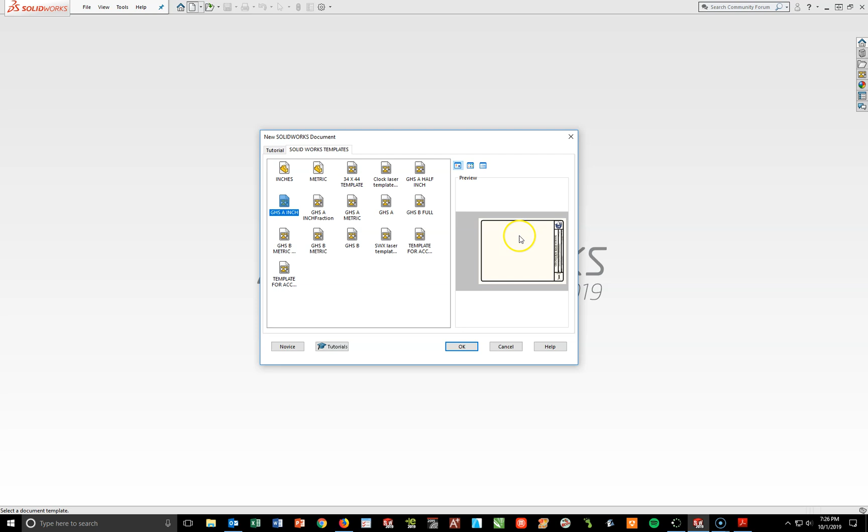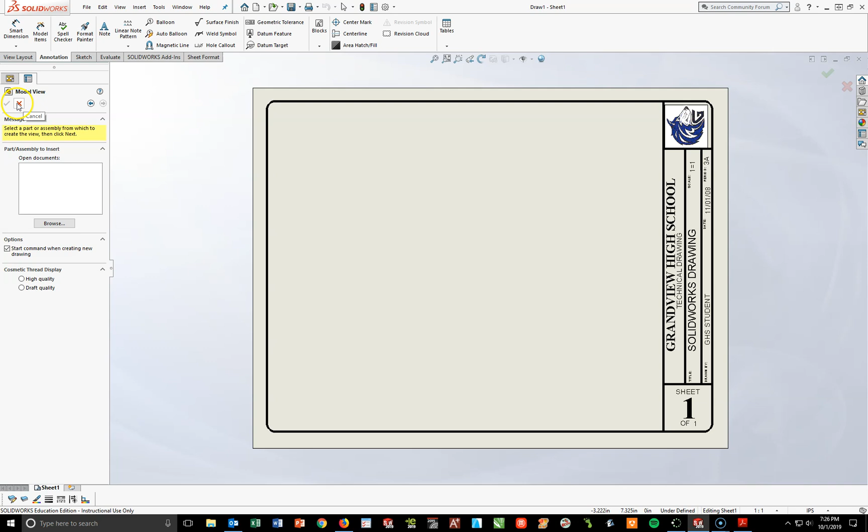Now, as usual, SOLIDWORKS thinks we're going to do a part drawing, but we have not created parts yet. We're just going to use the paper simply as a sketch tool. So I'll go to my left where the red X is under Model View, left click, and then hit my F key to center up the paper.

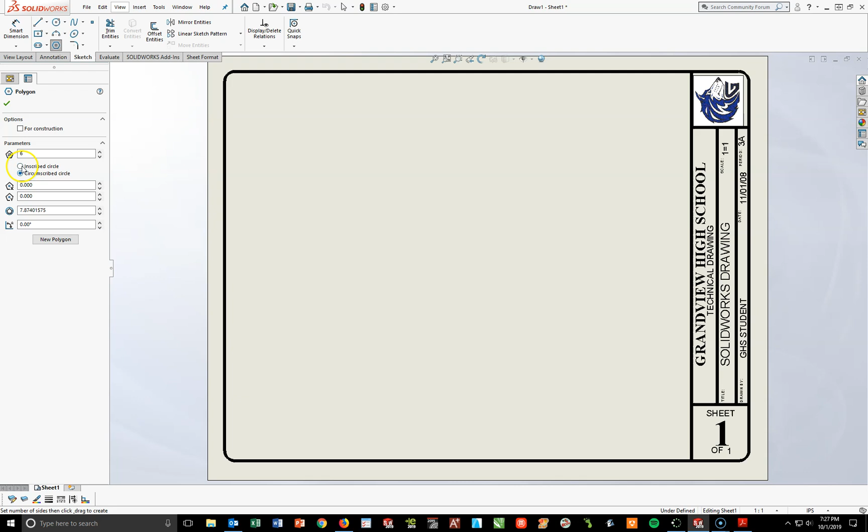Now we're going to start this off with a circumscribed polygon. I'll go under my sketch toolbar and start with a six-sided figure. I'll go up to my polygon tool, use the six-sided option, but I want the circle to be circumscribed, meaning the circle is on the outside edge. So I'll click in the middle of my screen.

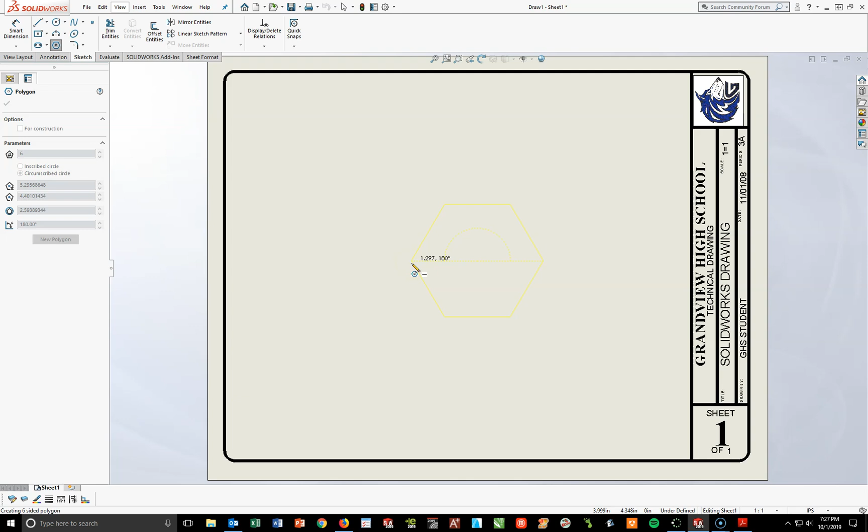I'm going to left click, and I want to make sure the horizontal line is flush at the top. I don't want to pull straight up because otherwise this thing will be twisted. I want to pull directly to my right or left horizontally, pull either way until it looks about the right size, and left click.

Now, at this point, I want to click the box that says For Construction under the Options tab. That automatically changes the lines to dashed lines, which is what we want right now. I'll hit my check mark or escape to exit the tool.

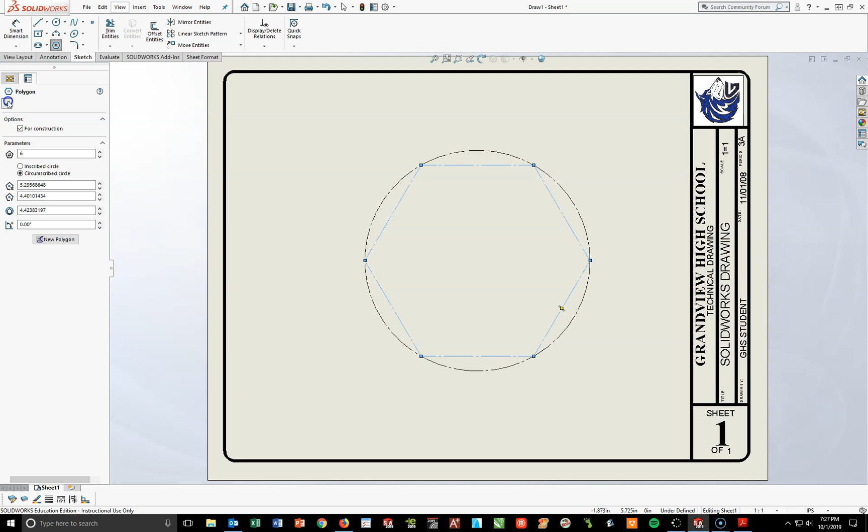I'm going to turn on my smart dimension, hit the outside circle, pull down, and make this a diameter of 4 inches.

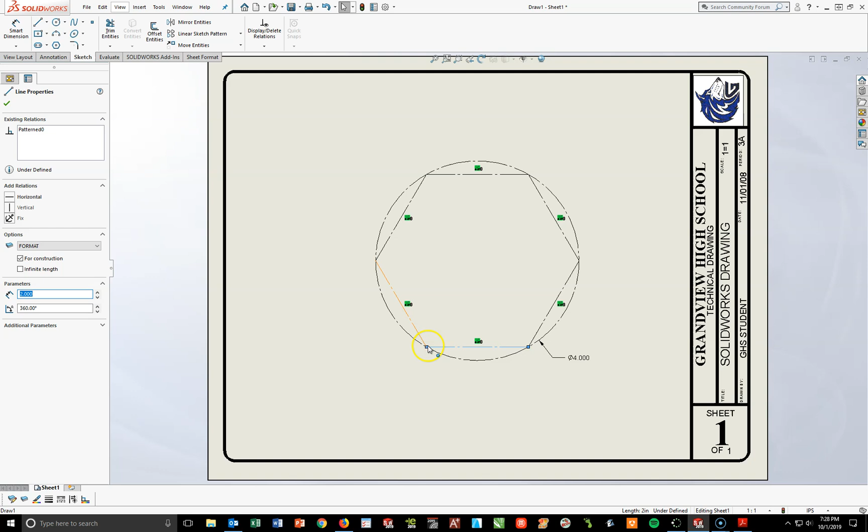Now I'm also going to make sure my lines are horizontal. I'll click on this bottom line and make sure it's perfectly horizontal so this thing is sitting in the right orientation. So I click on the bottom line, look to my left, and click the word horizontal. Hit your check mark, and now you have your part ready to start.

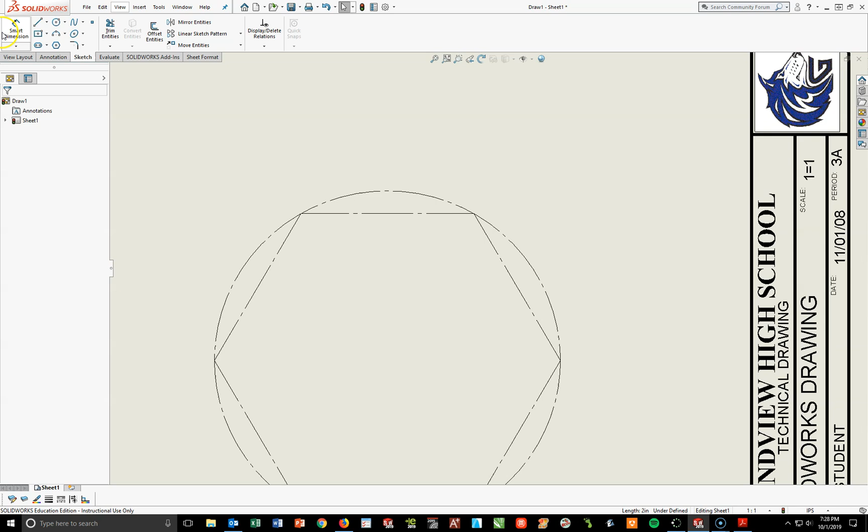The next thing I want to do is add some circles. I'm going to add 2 circles to each vertex of this hexagon. I'll turn on my circle tool, go to each corner, and draw 2 circles.

Now, I could also draw just one of these and pattern it 6 times, since we've been using the circular pattern tool, and that would work also. But in this case, I'm going to get these in here, dimension both circles, and make the circles equal to each other as I work around the part.

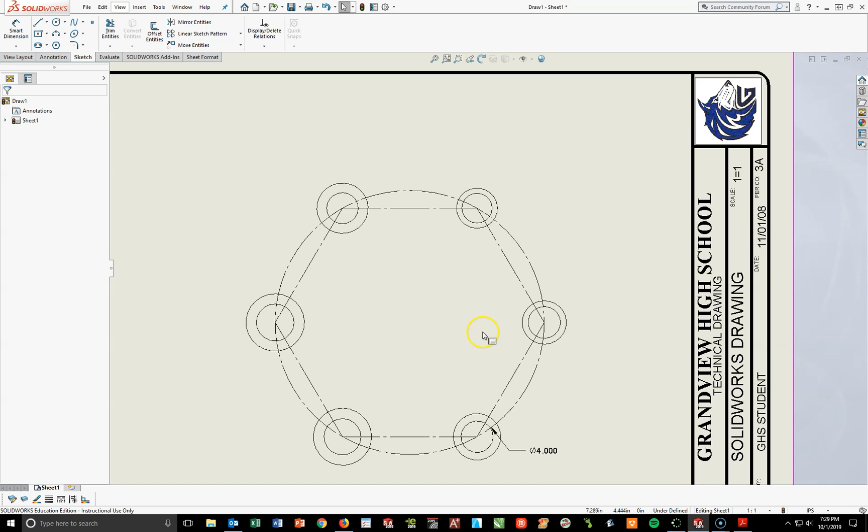So I'll start off by adding a dimension on this outside right-hand circle at 1 inch. Then I'll click the inside circle, pull down, and dimension this to a diameter of 0.5.

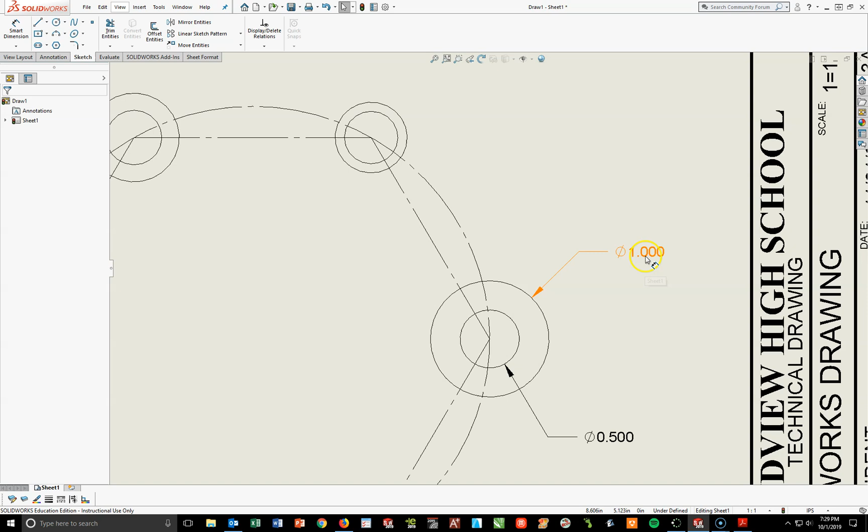Now I'm going to turn my dimensioning tool off, and holding down my control key, I'll click on all of the outside circles first. So holding my control key and continuing with my left mouse button, I hit the outside edge of these outside circles, then come over to the left and make them all equal to each other.

Hit your check mark. Now I'll repeat that pattern by doing the inside circles. I'll hold my control key, click on each of the inside circles, all 6 of them, and again, to my left, make them all equal.

Now I'll add in the notes as I go. This one has a 6 x 1.00. I'll left click on this, and over where it says dimension text, put my cursor in front. I'll type the number 6, turn on caps lock, spacebar, X, space. Actually I'll get rid of that last space. That looks good enough. Hit your check mark.

Now I'm going to do the same thing with this one. This one says 0.5, 6 holes equally spaced. So I'll put my cursor at the end of this mod diam DIM. I'll hit my space key, type 6 holes, hit enter, and then type in equally spaced. Hit your check mark when you are done.

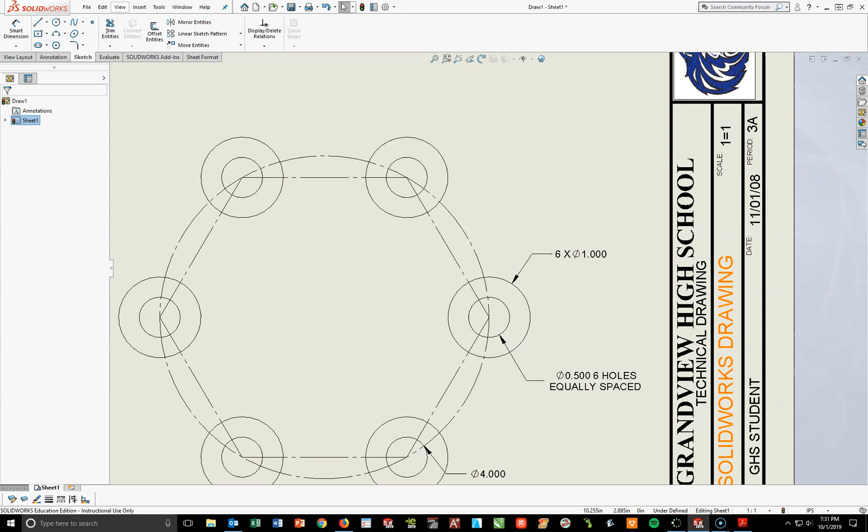Okay, now going on to the next step, I need to actually go back - I forgot one other step. I've got to draw some construction lines across this part. So I'll go back up to center line, hover on this left diamond, pull a little bit out, left click and pull across.

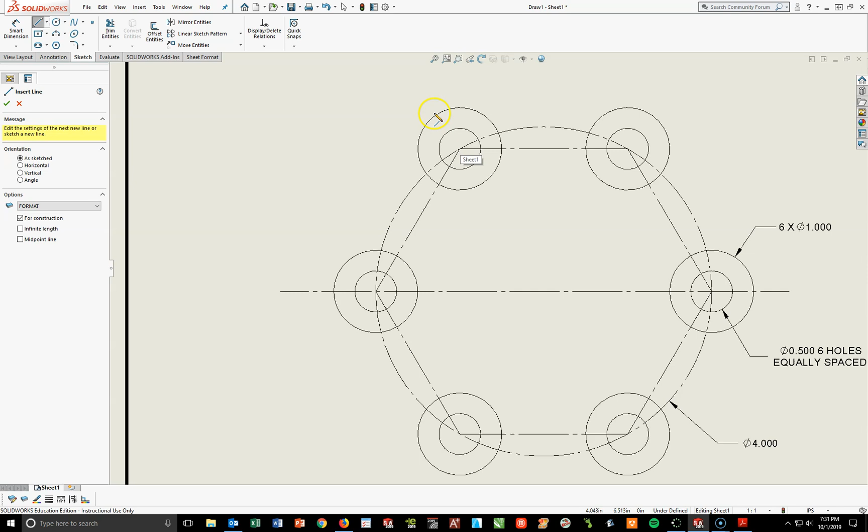I'm going to do the same thing here, pull out this part right here. Honestly, what I'll probably end up doing on this one is just go ahead and draw a couple lines, one this way. Then I'll add a relationship between that line and this corner using my control key, and make them coincident. I'll do that at both sides. So I'll come down here, hit this corner, control key, this line, coincident.

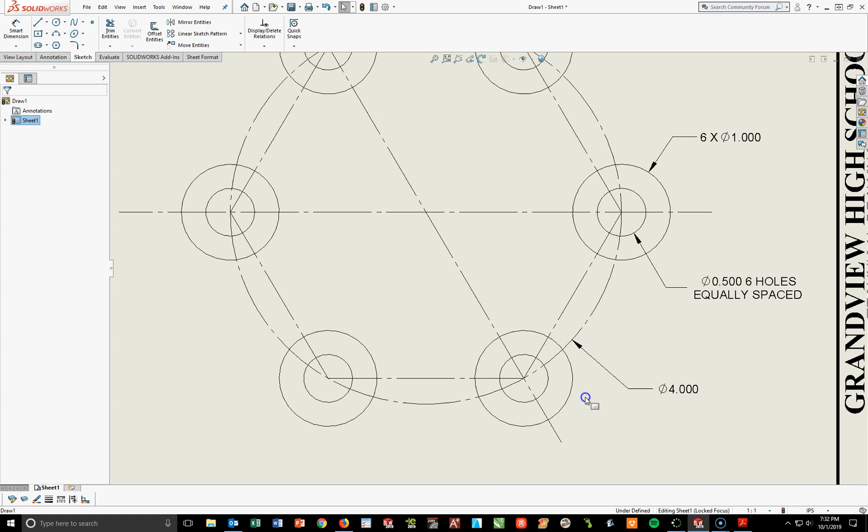I'll repeat that one more time. I'm going to take the next line, draw it across the part, hit escape to turn the tool off, and holding my control key, take that corner and this line and make them coincident. I'll go up top, hit that line and this corner, and make them coincident. Check mark.

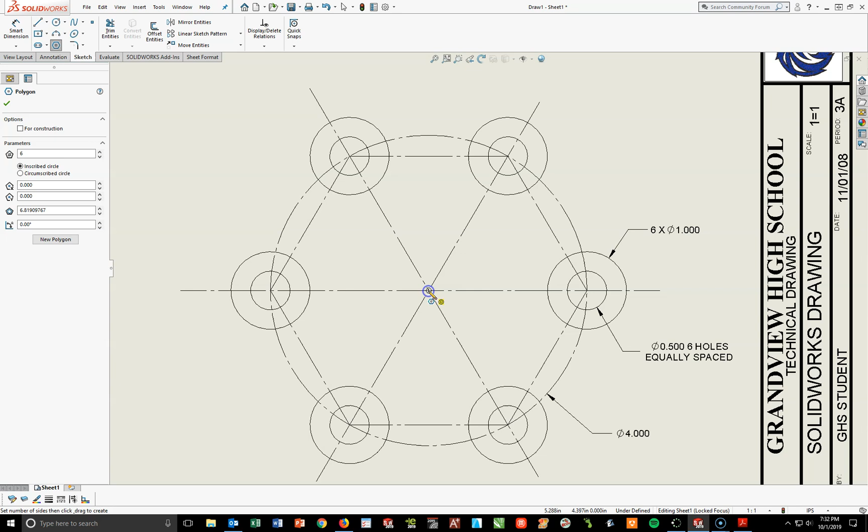Now from here, what I want to do is come in - I actually got to add in one more thing. I need to add in another hexagon on the inside. So I'm going to draw a hexagon at this center, and again pull it to my right, kind of along this orange line until it looks about the right size, then left click. Now for this one, I don't need the inside circle, so I'll highlight that circle with a left click and hit my delete key.

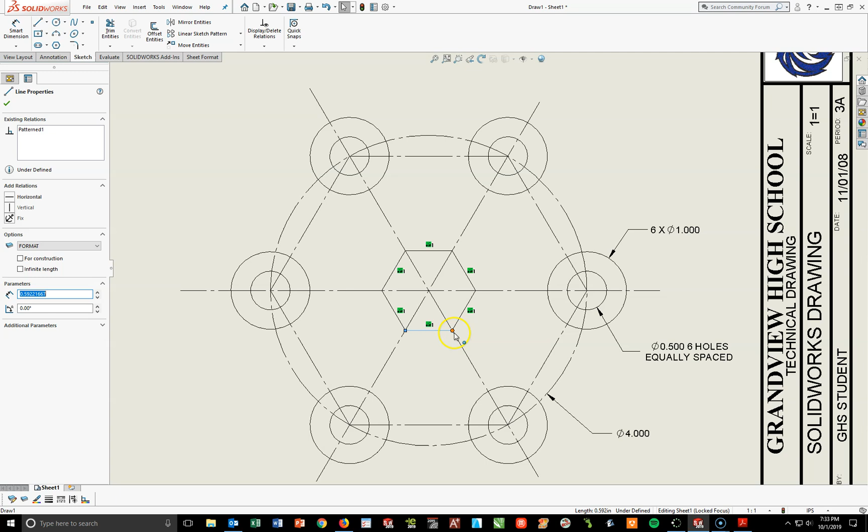I'm going to verify this line here is horizontal, so I'll click on the bottom line, come to my left, and hit horizontal. Now I'm going to smart dimension from the very top here to the bottom, pull off to my left, and type in 0.75.

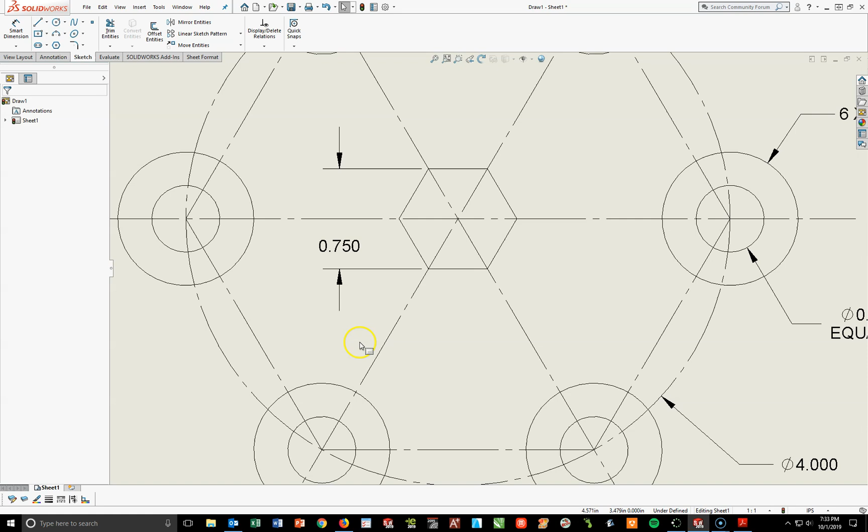Now I want to offset all of these construction lines here, and I need the offset to be 0.1 bidirectional - you'll see that in the set of directions I provide in step 3. So let's go to our offset tool up here at the top. I want 0.1 in there. I do not want to add dimensions, but I do want this to be bidirectional. That means when I click on a line, it will go 0.1 to the left and 0.1 to the right, for a total distance between lines of 0.2.

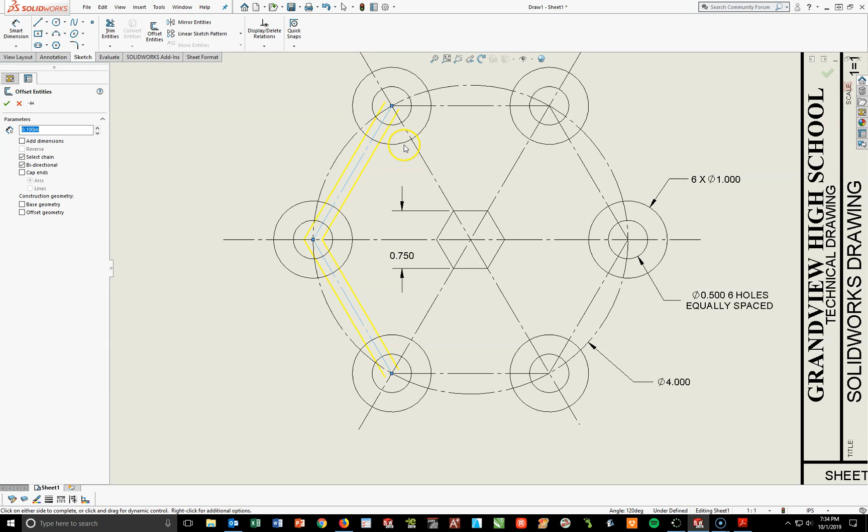That's what we need for all these lines. As I start clicking, you'll notice it's giving me two of these lines - one at 0.1 this way, one at 0.1 that way, for a total distance of 0.2. I'm going to do that all the way around this hexagon, and then do these lines too. So as you can see, I have all these double lines in here. I hit my check mark.

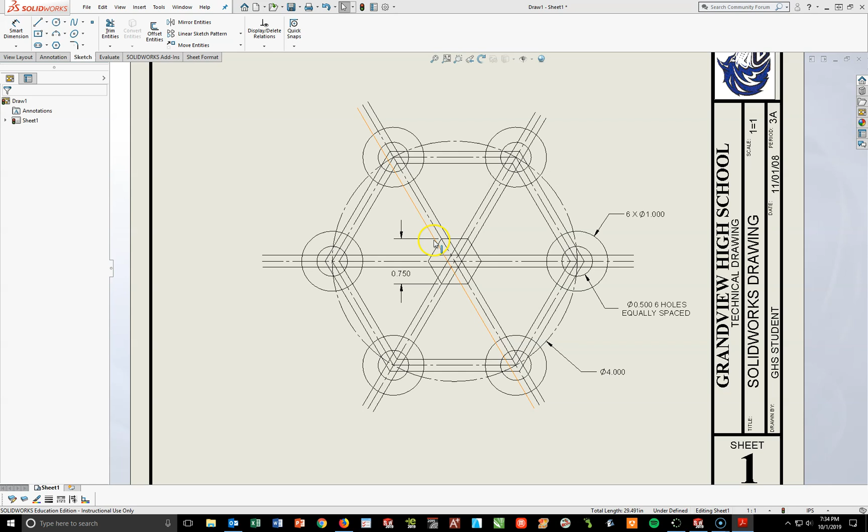Now I'm going to go ahead and do one more offset here. I'm going to offset this hexagon right here by 0.2 - so this one's not 0.1, it's 0.2. I'm going to hit 0.2, and I'm not going to do bidirectional, just go ahead and hit this outside so it goes out 0.2. I'll hit my check mark.

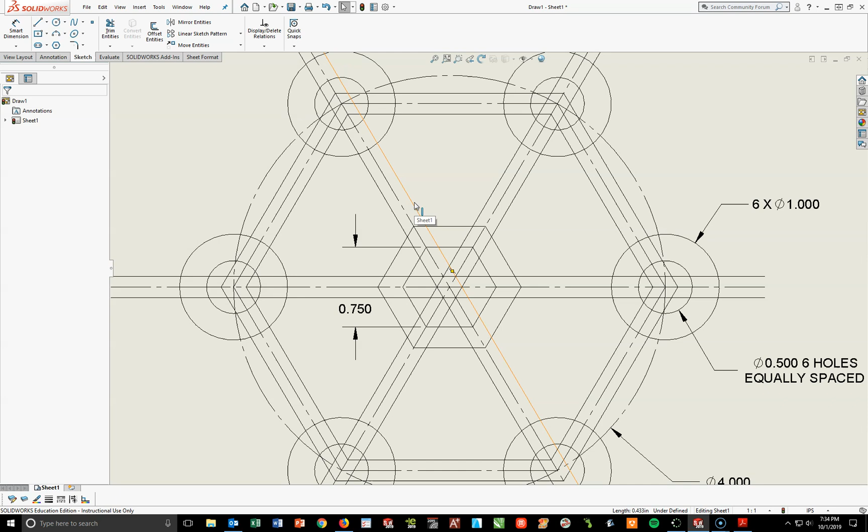Now what I want to do is some trimming here to kind of get this part to start to shape out. So I'm going to turn on my Trim Entities tool. I'm basically going to come in here and trim these lines. I've got to be really careful here because some of these lines are really close to the edge of the circles.

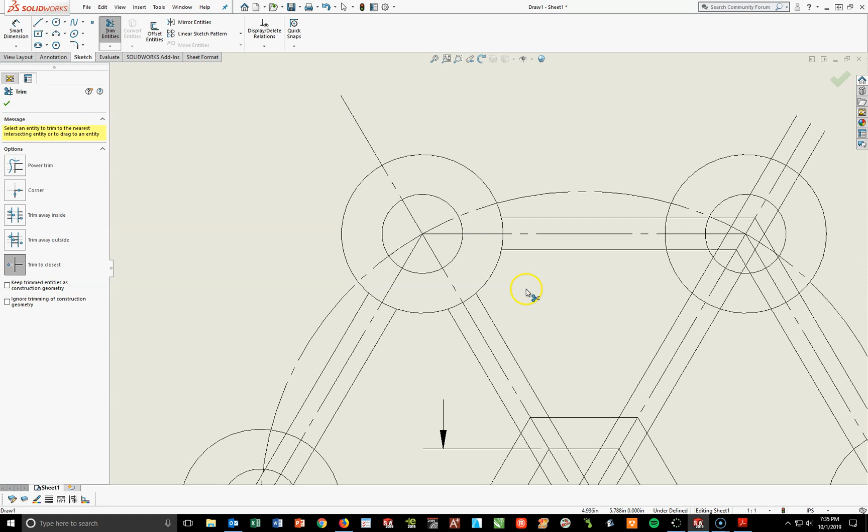And I'm going to do that to each of these circles. So trimming this down. So I'm going to get every circle looking just like this. So this is going to take some time. So I'm going to come in here and get rid of this line.

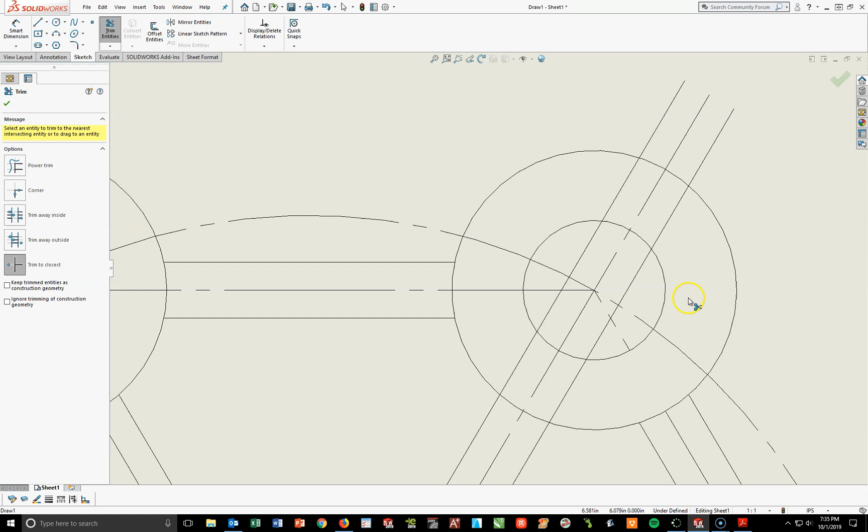Okay, circle number 2, continuing over here, same thing. Oops, I need to Control Z that last one because I need that line in there. Actually, I should Control Z it twice. There. Going back and retrim. I need to keep that center line. That was a mistake on my part.

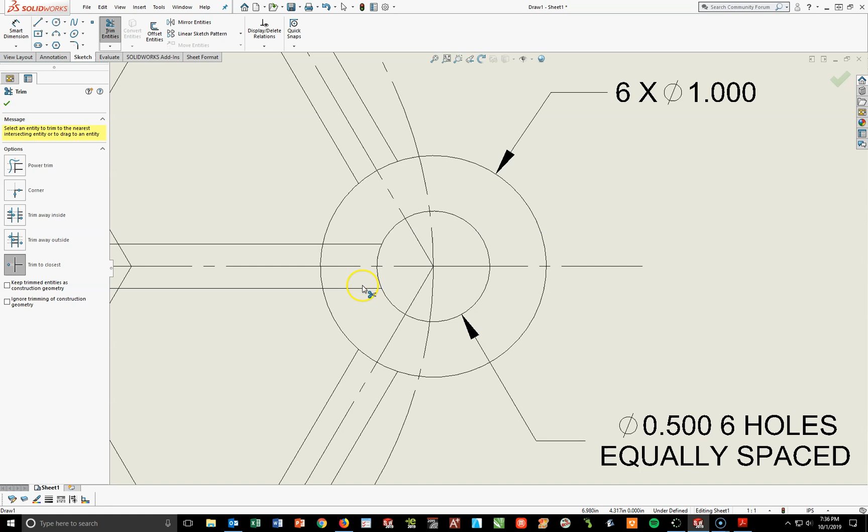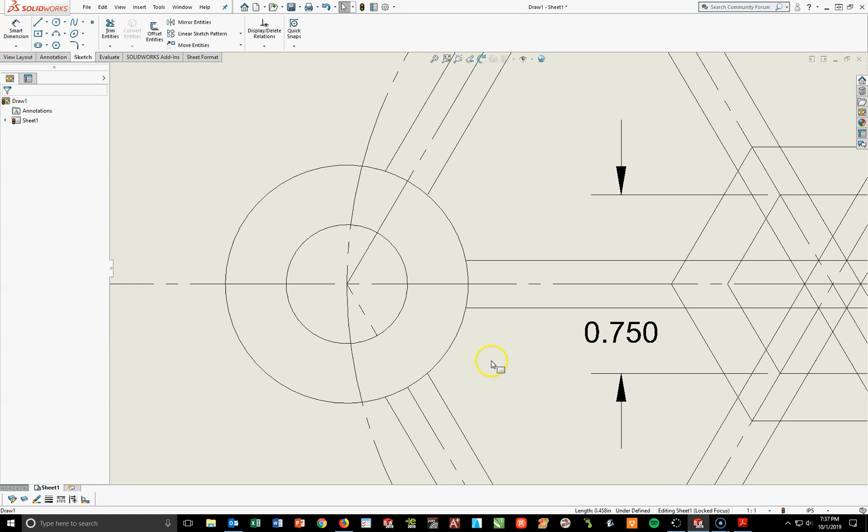Okay, there's 3 of the 6. I got to keep working on. Do the other side here. And actually what I'll do is I'll save myself some time by highlighting these lines and just deleting them now, since I have trimmed them. That way I don't have to trim quite so much. Okay, and get rid of that one and this one. Okay, continue on down, trim these out.

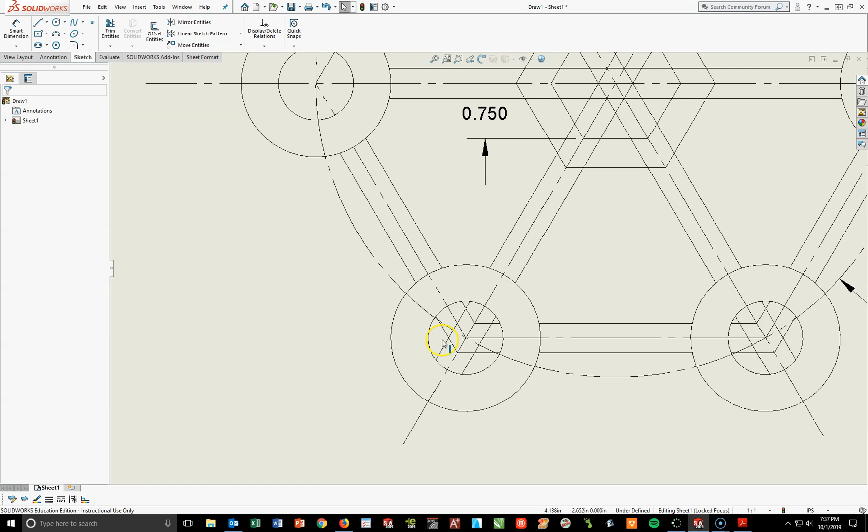And then I'm going to go ahead and turn my trim tool off, and I'm just going to highlight these individual lines now and just hit my delete key. Make it a little bit faster, a few less clicks, make it a little bit easier on myself.

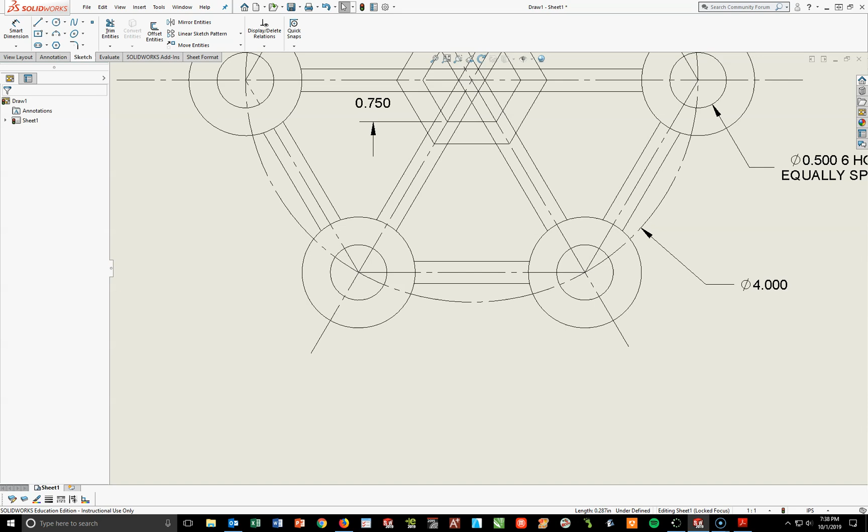Okay, oh, I got to trim in here too. Almost forgot this part. I need to trim inside here. Same thing. Trim these pieces. And then I'm going to turn this off, hit escape, and then come on in here and highlight each line I don't need and hit delete. Delete.

Okay, so that takes me through step 4 right there. So if you're following along on the written directions, that is step 4. I'm now going to move on to step 5. So looking on the step 5 here, now what I'm going to do is start trimming off inside these circles.

Okay, so what I'm going to do now is, again, with my trim tool, I'm going to begin trimming these little pieces off to open this up. So I'm going to do it around each circle and then also around this hexagon. So we're basically opening these up so they look like they're all blended together. Okay, and then continue around the circles.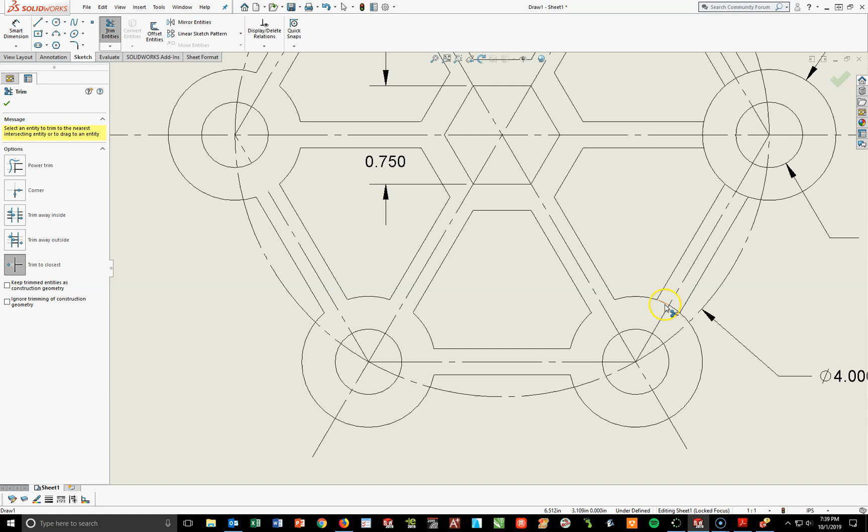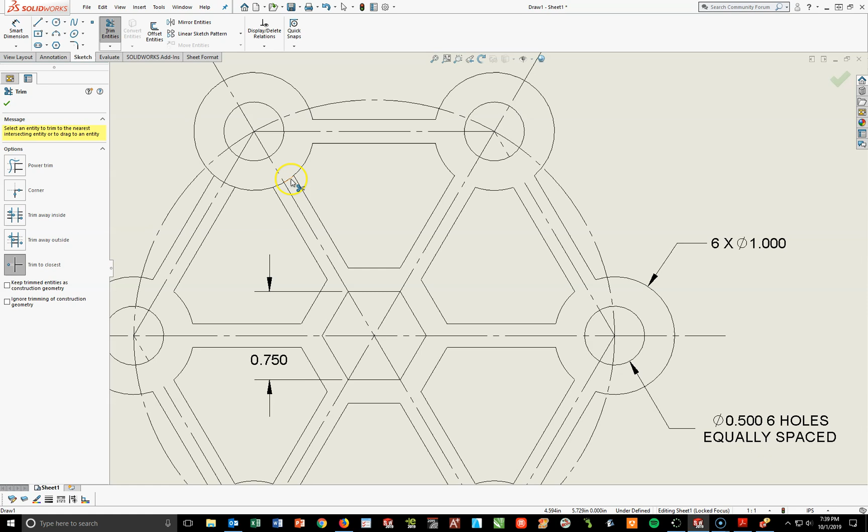That's that one. Continue on here. Up this way. Continue up around here. And then finish off up here. And turn off your trim tool. All right, so that takes me through step 5.

So now what I got to do is start turning on my fillet tools. Okay, so we're going to start rounding off all of these sharp corners. So we're going to just work our way around. In this case, the fillet tool will be 0.2. So I'm going to go ahead and go to my sketch fillet. Instead of 0.1, we're going to put in 0.2.

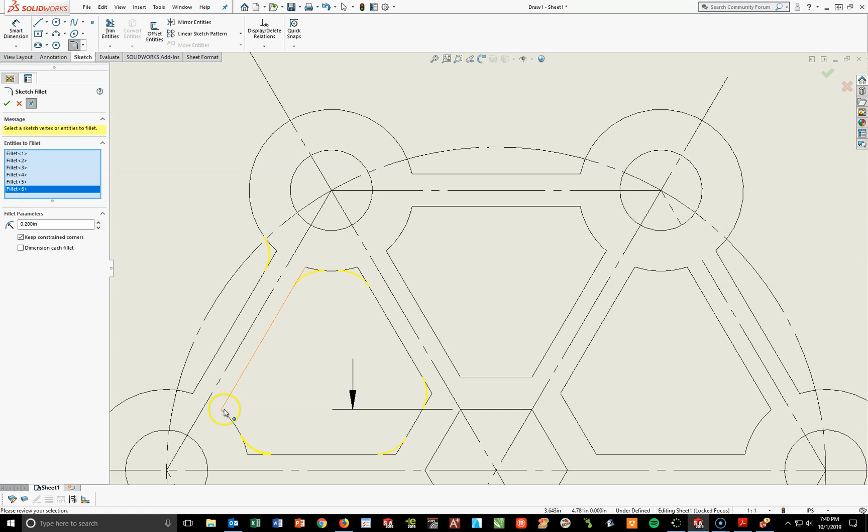And now I'm just going to go around and start clicking on corners and saying yes all the way around the part. Now this only works if you have true corners. If you don't, it will not work for you. So the key is to get all these corners trimmed off so there's nothing interfering with them. And now I can come over here and hit my fillet tool and get all my fillets correct, because you can start seeing the preview.

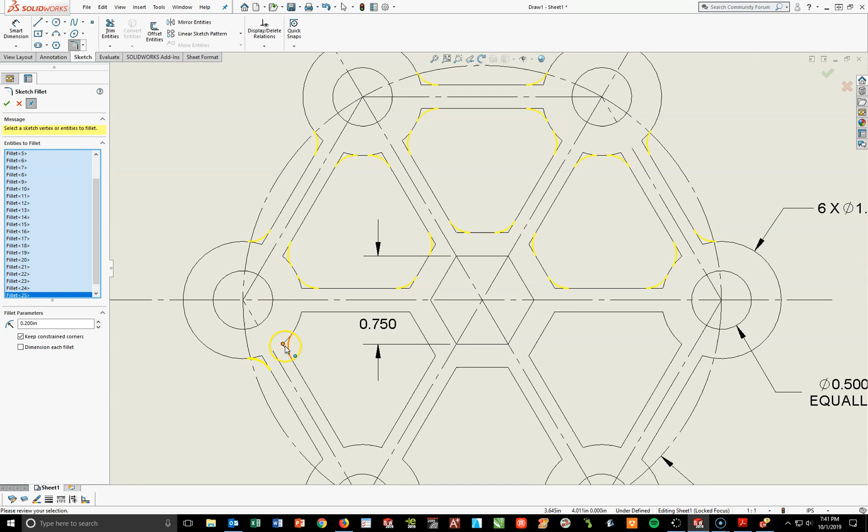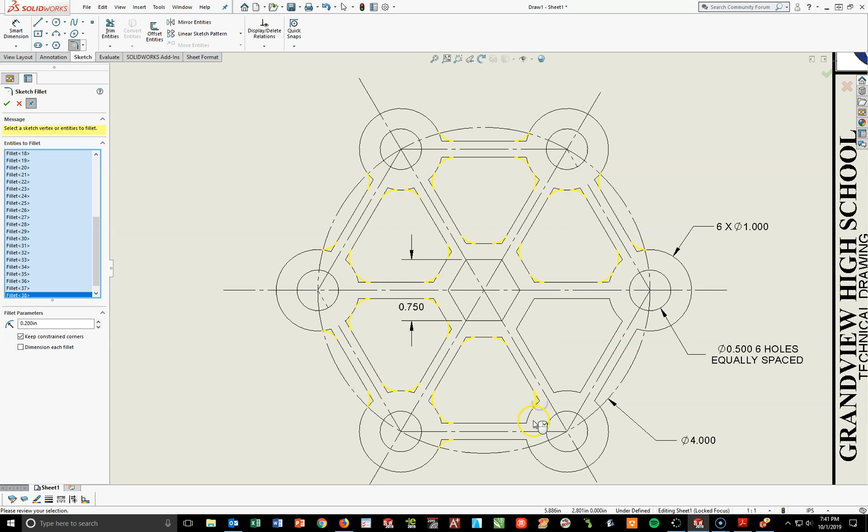Okay, so there's the upper half. Continuing to the lower, and then click the outsides. And yes. And the last quadrant here.

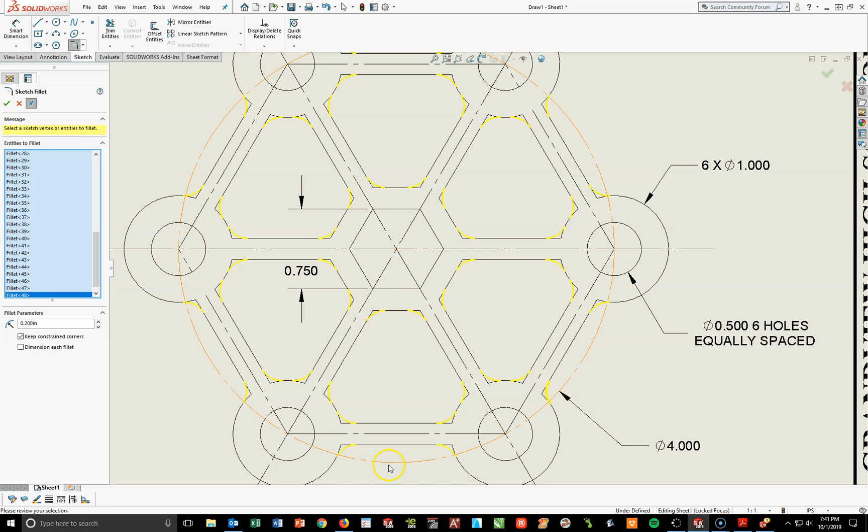I think I have all my edges rounded, which is what it looks like. So at this point, hit your green check mark. It'll take just a second to go through. Go ahead and exit out of your sketch fillet. So there you go. This is what we're looking at.

Okay. Now in this case, I'm going to go ahead and add in a dimension here. So I'm going to turn on my smart dimension and click on this and pull out a little bit. Don't worry about this. I'll say okay, I'm not worried about it. I'm going to hit the little dot at the back. And I'm going to highlight this and over to my left in the dimension text box, I'm going to space, put my cursor at the end, caps lock TYP.

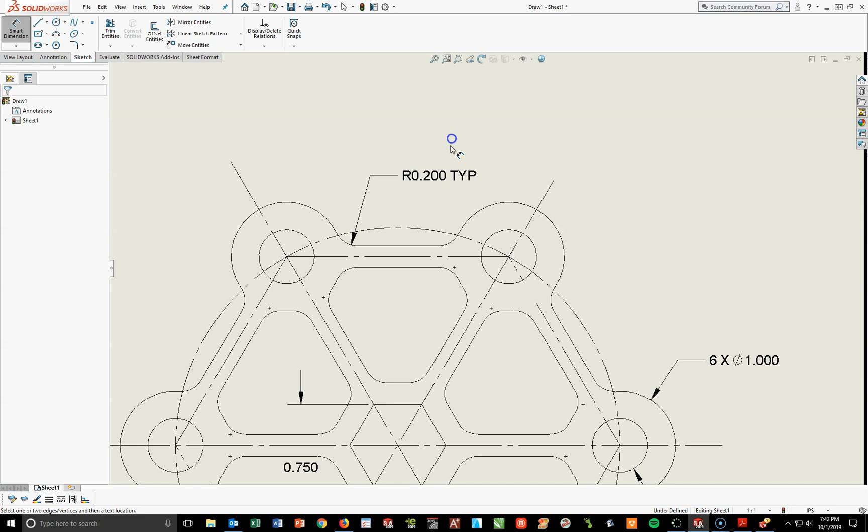Okay, and that's all I need right there. All right, so that pretty much takes us right to the end. Now, a lot of you are saying, if you're reading this, and the questions that were asked to me were, this is not like the answer key. Well, the answer key actually was step number 7.

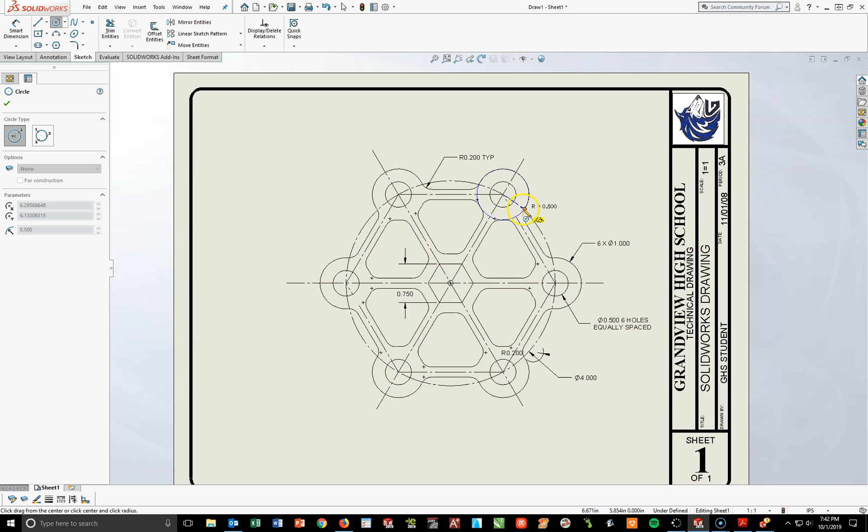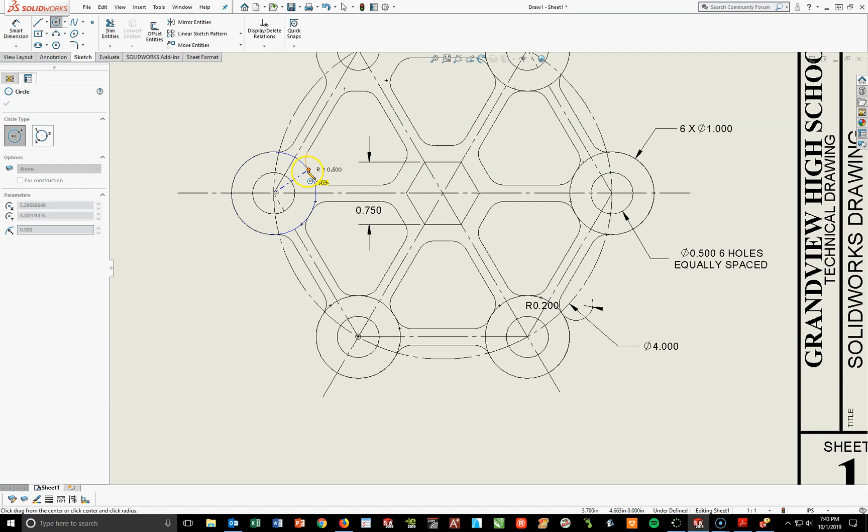The final step to all this was then to come in and add circles, basically touching these corners. Okay, so you can pull anywhere and just basically you're going to come in here, attach, pull to a point. Okay, middle, pull to a point. And so we're just going to redraw circles on top to make it look like they're supposed to. At that point, this would be what your answer key looks like.

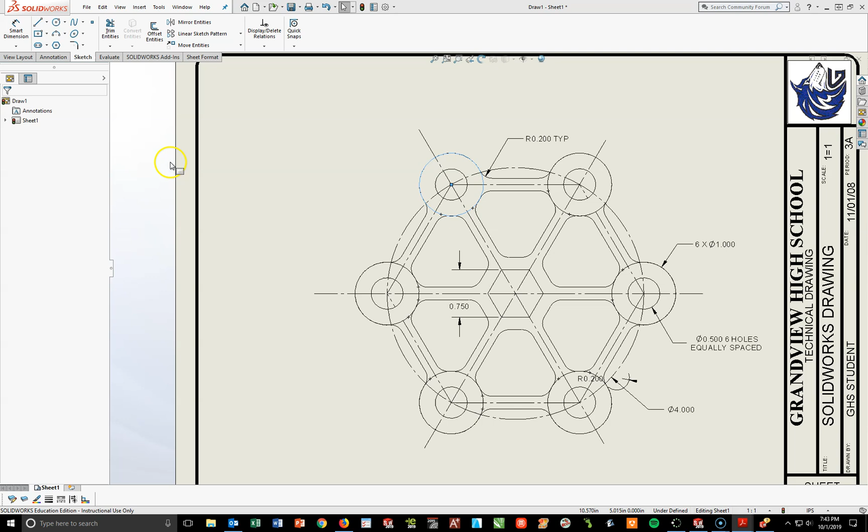Okay, so in this case, what we're going to do is add a title to this and get our title block done. All right, so now I'm going to get that set up so that we make sure all dimensions are on there, everything else that we need. I've got my point 2 here. I do need to add one more on this side, which is going to be between that line and this line with a slight pull out. Check mark, and then over here to the left I'm going to type in TYP.

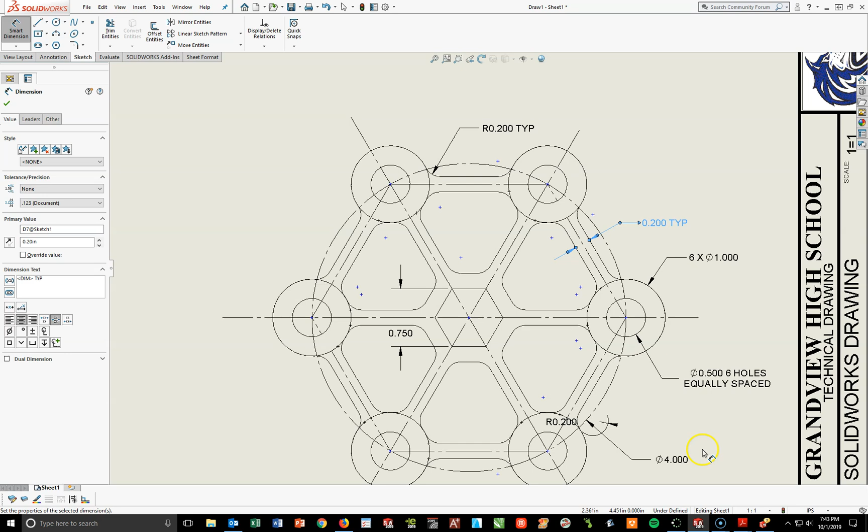Okay, I have my 6 by 1.00, my 0.5 6 holes equally spaced. My 4.00 is down here. I see this extra dimension, so I'm going to highlight that and delete it out. My 0.75 stays right here, and if you want to flip the arrowheads, you're more than welcome to. You can click on the arrowheads and then pull this slightly out like it is in the answer key.

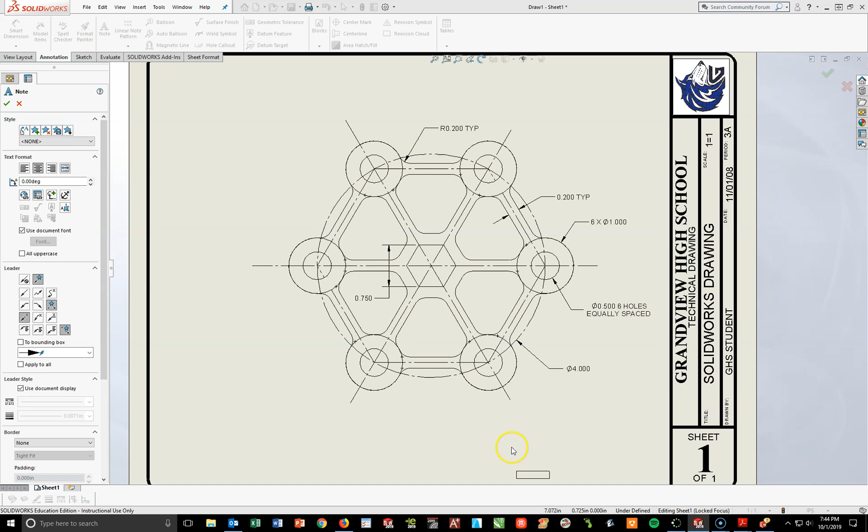The last thing I need to do, now don't move this around because if you start to try to move things, you could end up messing the whole thing up. So I'm going to leave it alone right where it's at. If it's not perfectly centered, that's okay as long as you have it on the paper. Now under my annotation toolbar up here at the left of Sketch, I'm going to hit my note tool. And I'm going to come below and left click inside and create a text box. Now that gives me my formatting box.

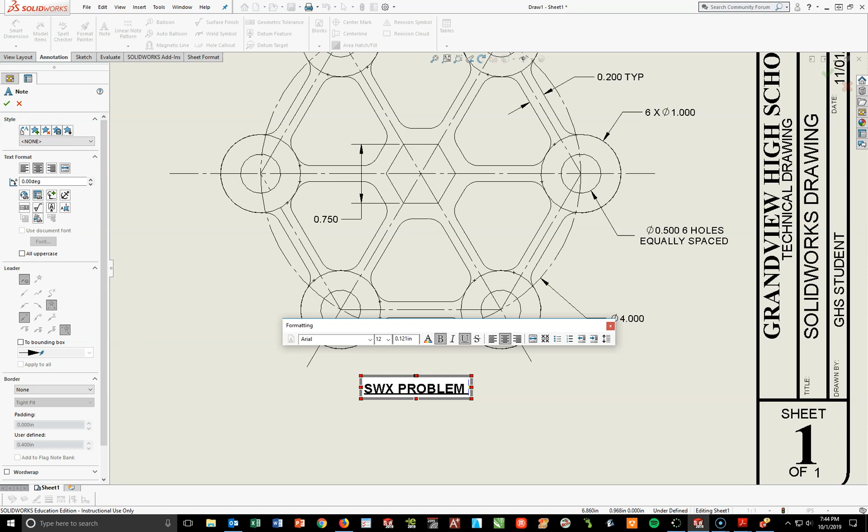Now remember, all of our titles are the same. We're going to keep it at Arial, the font size of 12, bold and underline, and centered. Caps lock on, and we're going to type in the following: SWX space problem number 20 space dash space spacer. Hit your green check mark and then adjust this wherever you need to put it.

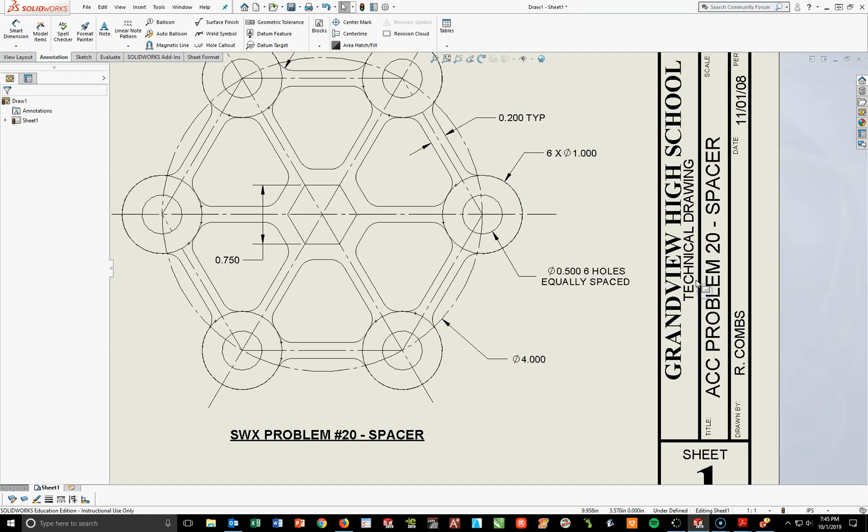Your final step here on this then is to come in here and clean up your title block. So where it says GHS student, double click and put the first initial of your first name and your last name. For title, we're going to type in ACC problem 20 spacer. Click outside. Adjust as you need to.

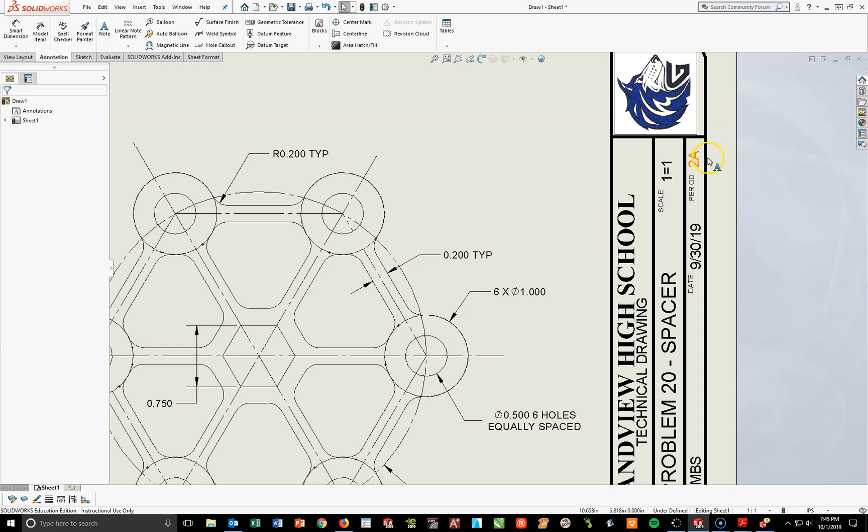Today's date will be, let me see, today is 9/30/19. Click outside, adjust as you need to. Period, I'm going to be 2A today, but put your correct period in there. Scale will remain at 1:1. Hit your F key, and this now completes problem number 20.

So your final step is obviously to go up and do a save as. Save it to your name, your H drive, CAD folder, and if you have a flat layout folder, that's great. We're going to name this ACC, oops, let me caps lock that, 20 underscore my last name. I'm going to add on the period. Say save.

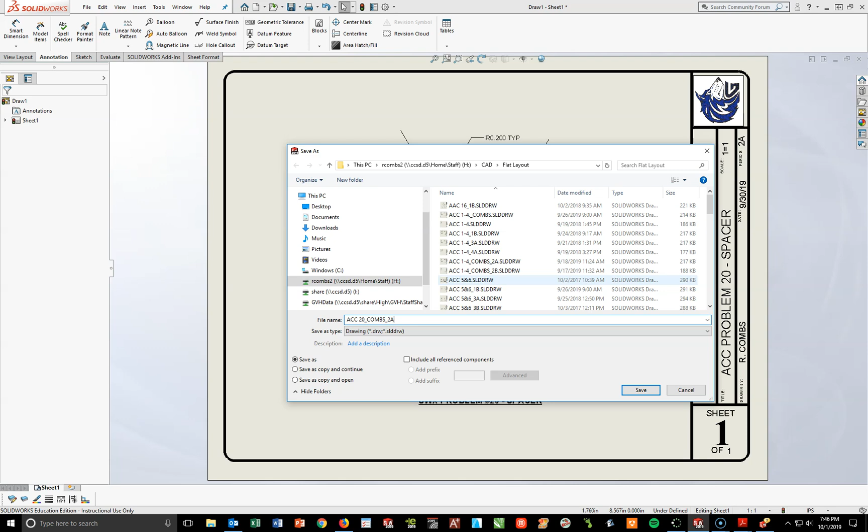The last step then is to print and turn this in. So I'm going to go up top to the printer, hit the little print button, go ahead and hit OK. Make sure you're in the correct lab. In our case, we're in L108. I'll say OK. It will show it's printing. Go collect it from the printer and put it in the collection box.

At this point, we are done with our ACC flat layouts. The only thing left to do is a quiz review, which is in the folder. So go ahead and try practicing that and get yourself prepared for the quiz. Use this video to your advantage. You can stop, pause, rewind, and fast forward as necessary. Good luck. If you have any questions, do not hesitate to ask.